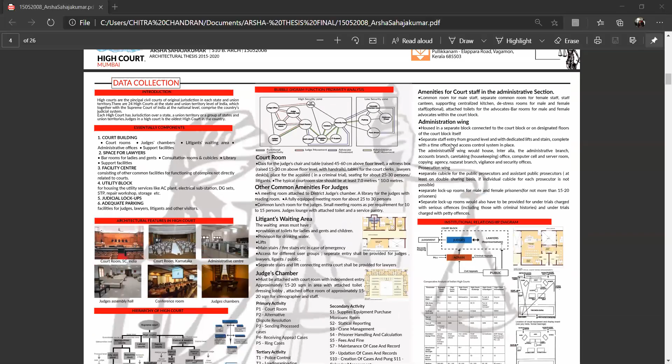My initial case study is the Bordeaux Court Complex in France. I chose this case study to study how in foreign countries the judicial structure is experimented with in its architecture.

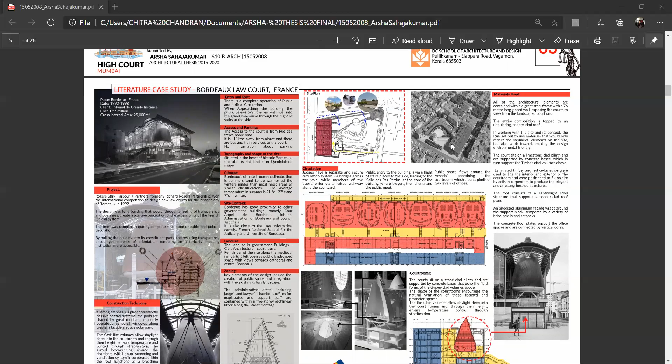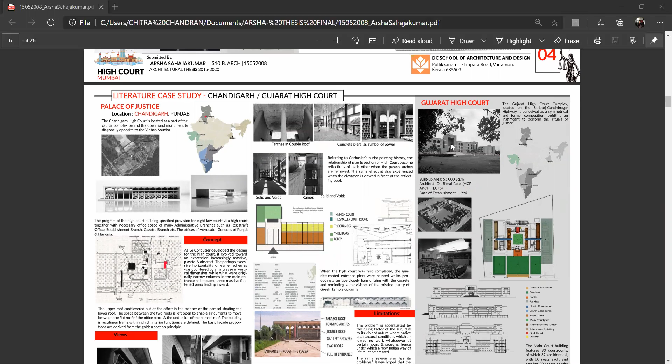After that, the Palace of Justice in Chandigarh - this case study was chosen to study the quality of architecture by Sir Le Corbusier. Later, I studied the Gujarat High Court because of the popular criticism from its end users.

My live case study started with Kerala High Court, one of the recent outlooks we have in modern high courts in India.

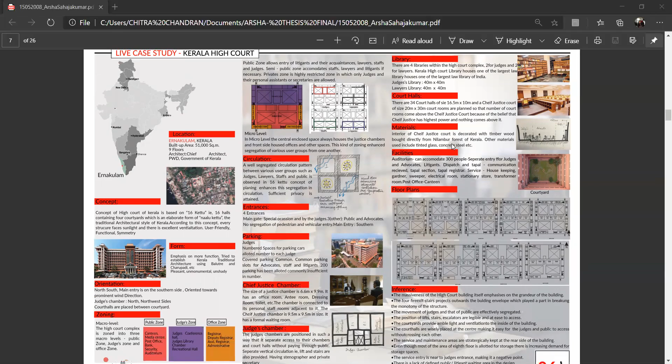After that, it was Chennai High Court, or the Madras High Court, which was one of the oldest high courts in India and one of the most traditional buildings of India.

The live case study was done to study the existing building, to study the functions of the Bombay High Court with its user group and the functioning of zoning, etc.

The Bombay High Court is battling severe space crunch. It has managed to function exceptionally well with outdated resources and temporary arrangements, but it's soon reaching its breaking point. The challenges are broadly classified as follows.

Crowd management is essential since the average footfall is 6,000 persons per day. The design aims to provide ample waiting areas for the public and tackle unnecessary crowding.

Providing a comforting work environment and freeing the staff from cramped and suffocating environments in the constrained site, keeping in mind the security, is one of the challenges.

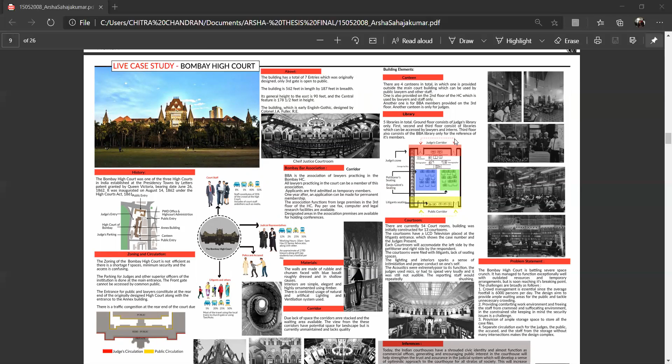Provision of ample storage space to store all case files, separate circulation each for the judges, the public, and the staff, and to provide storage without intersecting and making the design complex.

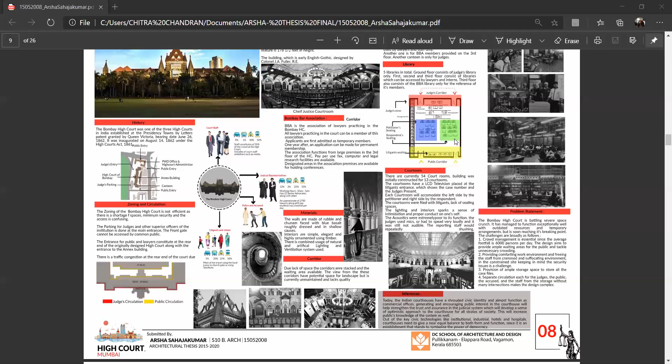The case study analysis was classified into different aspects with specifications: concept, site planning, build typology, site impact, contextual response, functional organization, vertical zoning, symbolism and expression.

Inference in area program: the Bordeaux Court complex in France has its openness. The court building stands amidst public space that has continued movement throughout the day. This movement has not been disturbed in the design.

The design also fosters the public by providing a public promenade on its site. Contextual response - it's responsive to the urban typology, with a fine-grained even texture that does not break away from the existing response to the site, but also stands out using its architectural expressions.

Structural experiments: the building plans that are repetitive are superimposed, creating harmony and order at the same time. The courtrooms are experimented with to be large, unique structures.

When it comes to Chandigarh, the Palace of Justice, it's a landmark building. The Palace of Justice stands as a landmark to the site. The building is an architectural monument constructed to speak volumes about the art and architectural heritage of Chandigarh. Massing.

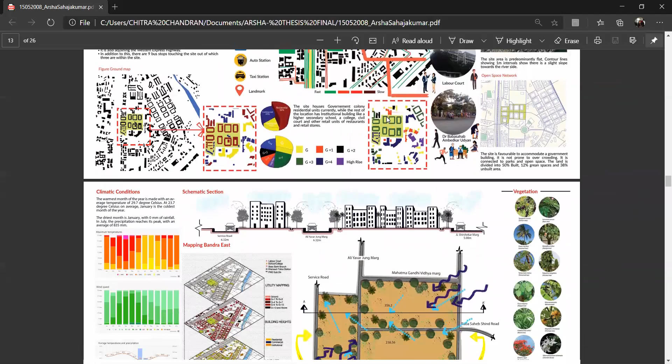The site's prominent wind direction is northeast and southwest. It has public roads adjoining from all of its sides and through its central axis.

The schematic section shows the current conditions of the site. It has government colony or government quarters right now on the site.

The site also has high potential for vegetation, as locally available plants were amply found near the site behind Mahatma Gandhi Vidhya Marg. Regarding climatic conditions, the warmest month of the year is May, with an average temperature of 29.7 degrees Celsius.

January is the coldest month of the year, and the driest month as well, with 0 mm rainfall. In July, the precipitation reaches its peak with an average of 835 mm.

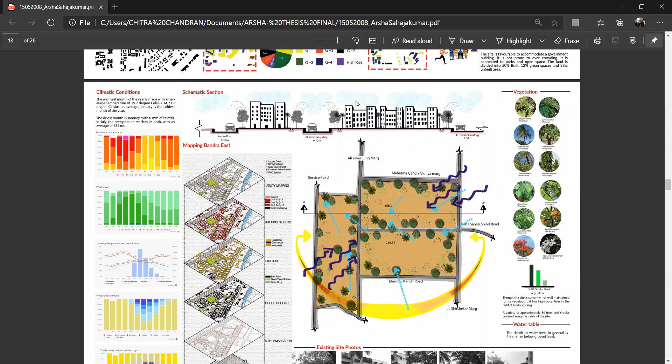Coming to the design program: what differentiates the behavior of a High Court building? Democratic sense, contextual response, form and function, segregation, transparent architecture, integration, and inclusivity.

The evolution of the design or form starts with the typical typology of the buildings currently existing at the site. It was rectangular, broken into two with a massive courtyard in between that acts as a heat-sinking agent, with prominent wind directions from northeast and southeast.

I use this typology to break it down to a circle that is broken into 2 semicircles, which stands out in its form but at the same time does not break away from the contextual response. Then an axis was provided to find out the most prominent or important site location at the site.

When it comes to concept, the concept is of the people, for the people, and by the people. Freeing up the ground for the people, having a distinct vocabulary of the people by becoming iconic, giving due importance to its function and its components, that is by its people, by providing transparency in architecture, creating an interior relationship, and also fostering individual privacy to each and every component.

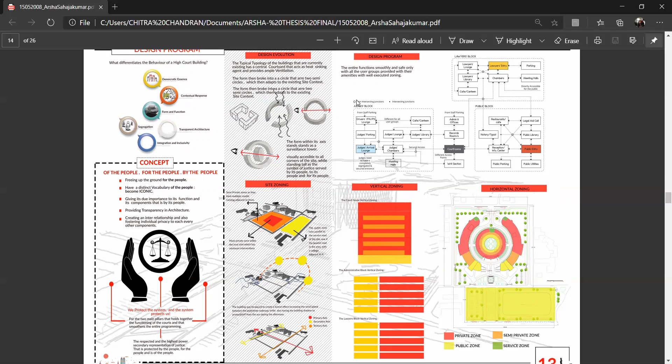We protect the system, and the system protects us. The 2 main pillars that hold together the functioning of the court, that smoothen the entire programming of the High Court, are the lawyers building and the administrative building. The respect in the highest power is a representation of justice that is protected by the people, for the people, and of the people.

The site zoning has been done within its zones, and then the weather conditions and the access that is provided.

My special topic is relevance of civic architecture. A civic center is a network of spaces or buildings that provides essential service to a city or town. My primary design tactics have been design for functionality, design for sustainability, choose the most effective layout, provide efficient wayfinding, inject character, foster a sense of security, set the tone through landscaping, and offer community amenities.

What happens to the High Court after its working time? What happens after 5 p.m.? The daily hours of working are from 10 a.m. to 1:30, lunch hours 1:30 to 2:30, working hours again from 2:30 to 4:45 p.m. So what happens after 5 p.m.?

This has been studied through a case study in Barcelona, the City of Justice Barcelona. Its features are massive: it breaks down the massive program into a series of separate but interrelated blocks on a public plaza, providing equilibrium to the relationship between different working areas, public areas, and landscape. All the buildings are accessed directly from the concourse building, which acts as a filter, gathering people at the start and completion of the judicial visit within the central public space.

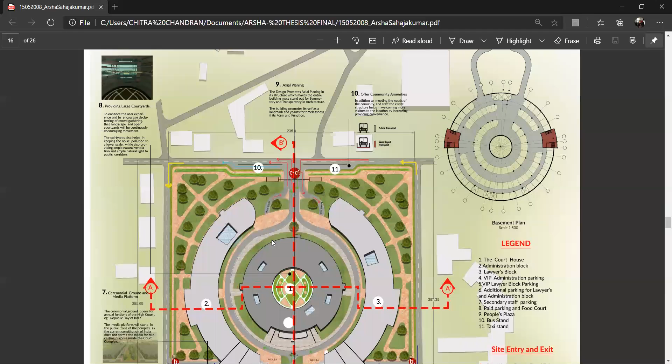The judge's entry is from behind, and there is a secondary entry for senior citizens and respected staff of the administrative and lawyer wing. I have proposed a multi-level parking facility for lawyers and the public.

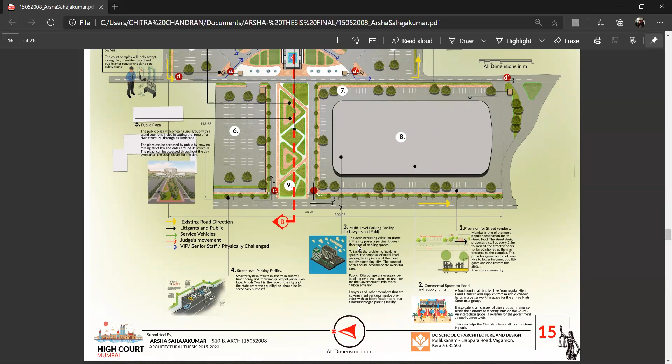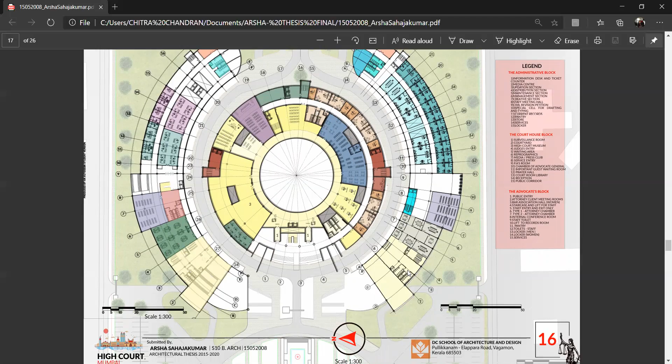Coming to the floor plans, my ground floor plan fosters the public and the media for the courthouse and for the other two buildings. Only the beginning of the buildings will be public facing, which limits its proximity to the courthouse and the beginning of the annex buildings.

The courtroom starts from the second floor. Adjacent to each axis, I have placed 8 courtrooms with their respective judges' chambers. Additional judges' chambers come superimposed to these judges' chambers at 3 meters height, and the courtrooms have 6 meters height.

The other side of the court complex will have conference rooms and storage facility, which doubles the facilitations for having more judges and storage facility, and also reduces the area by not giving 6 meter height for the entire building.

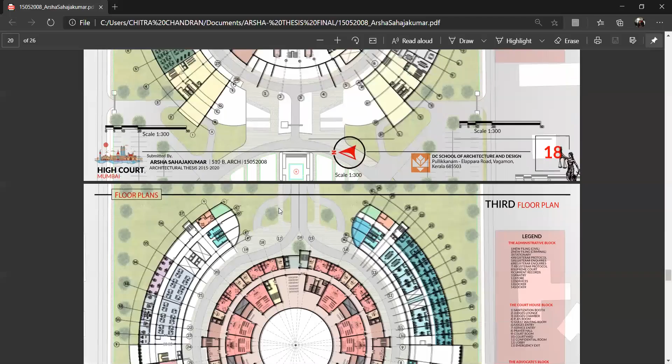I have 48 courtrooms placed in 6 floors, and the seventh floor will have the judges' restaurant, the chief justice chamber, the chief justice courtroom, the judges association hall, along with the records room and their library.

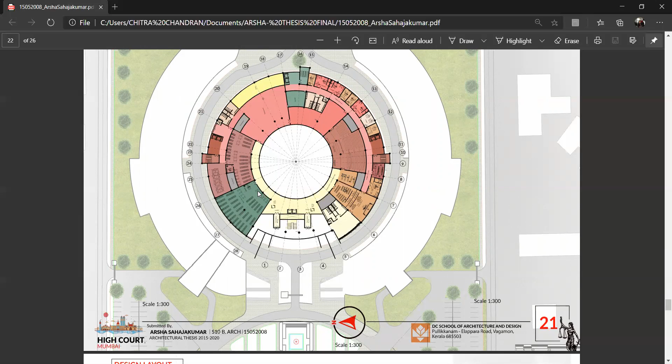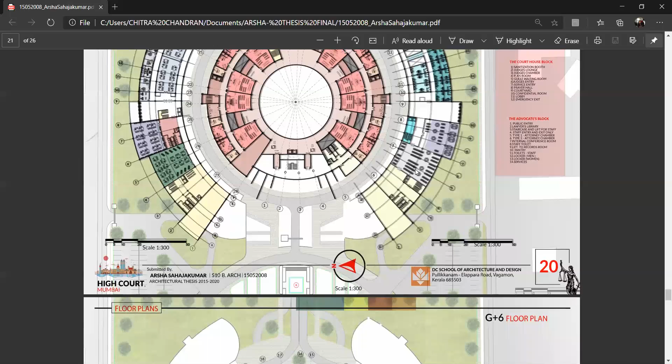The similar kind of thing is carried on in the lawyer and administrative block, whereas the working members or the continuous chambers and rooms are provided towards the outer end, and the public places or community gathering spaces are given in the initial phase.

This is the design layout which shows the zoning of my courtrooms, how the public stands for yellow, and how the judges' chambers will be segregated. It will have 2 judges' chambers along with 1 courtroom.

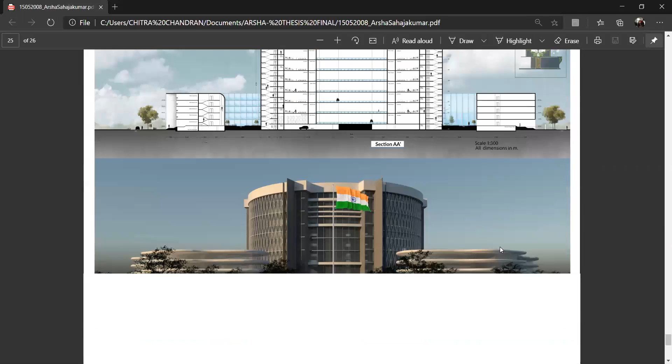The sections. This section cuts along the axis of my building. Thank you.